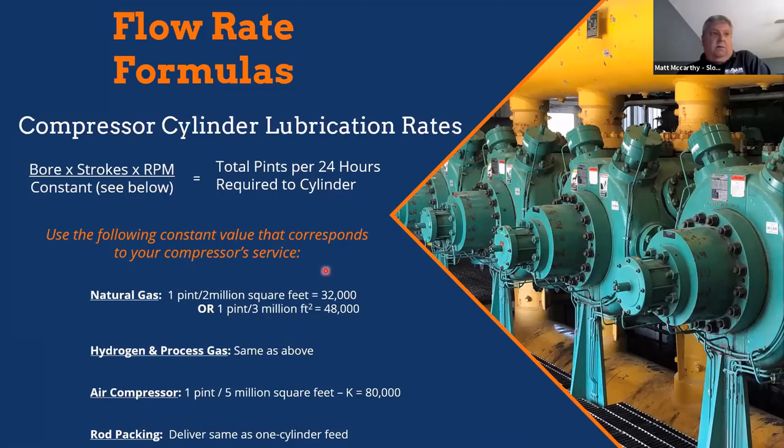If you're on that integral engine, if you're involved with those, then the power cylinder lubrication gets calculated out as well. That's part of a dual zone system where we're doing compressor lubrication and power zone lubrication.

Power zones are calculated by using the brake horsepower of the engine times 8, which is 8 pints in a gallon, times 24, which is 24 hours in a day. Then we're going to divide that by a constant, which is provided by the manufacturers. For example, in the Cooper-Bessemer GMW series, that number is going to be 7,500.

The resultant answer to that is how much oil the engine needs totally, and that will be divided evenly amongst all the power cylinders. Then on each power cylinder, it will be divided evenly amongst the number of feed points on each power cylinder.

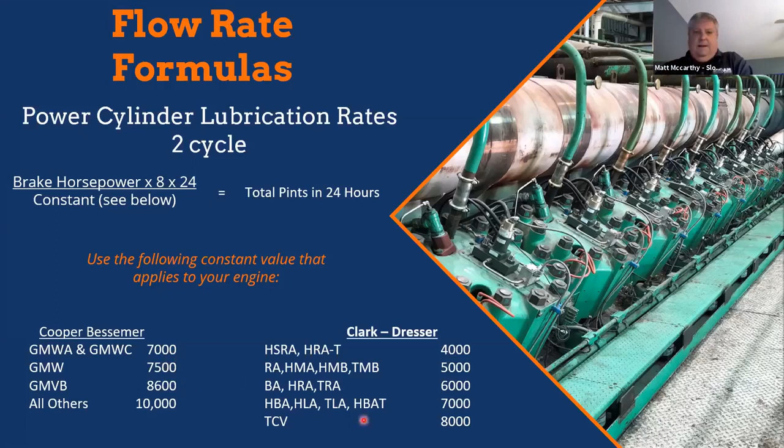Now, if you're doing a 4-cycle engine, such as an Ingersoll, KVS, KVRs, there's only valve guide lubrication, and for those we calculate 0.05 pints a day per valve guide.

So in our example here, this is a Cooper GMVC. It is an integral natural gas engine. That means, for those who are not familiar with the integral side, that this is the engine and it's integrated with the compressor cylinders, which come out on the left side here, and then they're banked down along the crankcase. So we're lubricating dual zone in this situation, power zone and compressor zone.

In this specific instance, we have all of our lubrication equipment just lined up on the end of the engine for easy access and visibility. The lubricator box, which is part of the component which drives and force feeds the oil down into the system, is driven typically by the engine. We can also drive it by an electric motor. We can control it in our tri-sip systems. We can have integrated PLC packages that completely run the whole unit off engine.

In this particular example, we've got 2 zones, as I said, one for power, one for compressor. So we have a pair of pumps for each zone that are adjusted to the proper flow rates based on our calculated requirements. These pumps individually feed divider blocks.

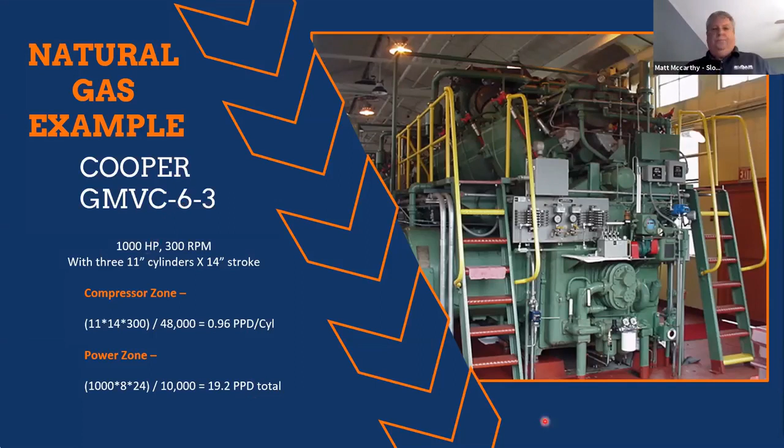Now, if you were calculating out the power zone, we're going to use the 1,000 horsepower times 8 pints in a gallon, times 24 hours in a day. We're going to divide that by the OEM spec 10,000, and we're going to provide to the power zone a total of 19.2 pints per day total. Then we're going to divide that up among the 6 power cylinders evenly. So that's where our calculations come from.

How do we get it in there? Well, we're going to force oil through from the lube pump through this divider block mechanism, which meters and delivers the oil in the proper proportions.

Now, in the old days, there was a pump for every lube point called pump to point. Today, it's divider block lubrication systems. In the old pump to point system, operators would adjust each pump to see a drop of oil in the sight glass drip at a certain fixed frequency.

10 drops every minute would deliver 1 pint a day. So if you needed half a pint a day to feed your packing case, you'd adjust that pump to 5 drops a minute.

Over time, that changes. Pumps wear, maybe it wasn't locked in and vibration starts to make the pump adjust differently. So a pump can clog up, a pump could go bad, and there was no way of knowing if a pump wasn't delivering the proper amount. So if an operator went by every day, took a look at the pumps, he had to measure every one of those feed points.

On that example on the Cooper, we're going to have 6 cylinders with 2 lube points on each one. That's 12 pumps. Compressor side, we're going to have 3 cylinders, another 6 pumps, plus the packing cases, another 3. So we've got quite a number of pumps and quite a number of drips to be looking at.

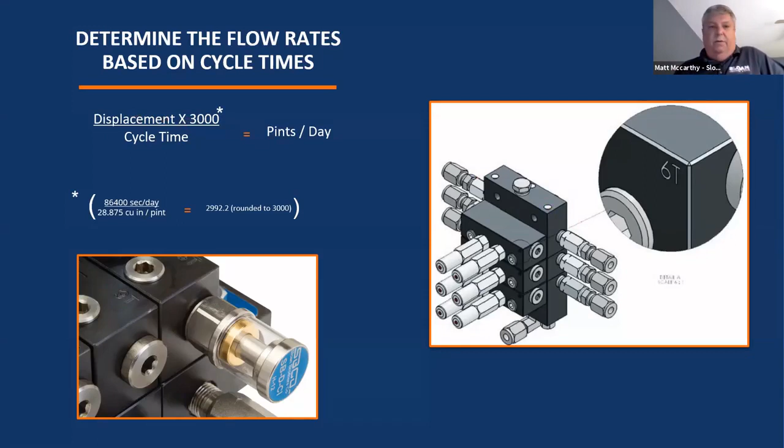Now, in order to know that this system is doing the job we expect, we need to do a lot of testing of the divider blocks on a routine, regular basis, and make sure our pumps are in reliable condition. So to know that a divider block is working right, we provide this test criteria, recommended on an annual basis.

The parameters are: we take a divider block, which is on the engine, take it off and put it on a test stand. We connect our hand pump or a purging pump and flow oil through the divider block, visually seeing that oil comes out of all the holes — a very nice, slow, gentle flow through the block, simulating the pump it's connected to when it's on the engine.

Once we verify that the block can flow free to atmosphere, it takes less than 500 pounds — in a brand new block we're seeing 200 or 300 pounds to cycle. So the delivery pressure for the hydraulic fluid going through the block cycles and moves all the pistons at less than 500 pounds.

The next step is to cap off one line at a time and force a failure by simulating a plugged line. So then we'll pump up the oil to 3,500 pounds and let it sit for 2 minutes. We want to make sure that oil does not bypass and bleed around those internal pistons or spools.

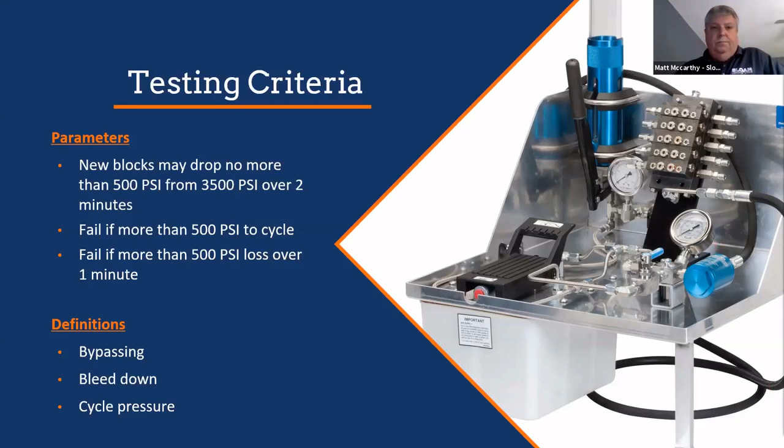So again, we verify first that the test pump is good and in working order. Remove all the lines from the block, connect the test pump, and run a purge to get the air out of the block. Pump slowly and watch for pressure less than 500 pounds. Block the outlet with a cap, pressure to 3,000 or 3,500 pounds, and time it for a minute. Test each outlet consecutively, one at a time. You can't put caps on all the outlets, pressure it up to 3,000 pounds, and wait a minute. That's not the way it's done, although that's a common misconception in the field.

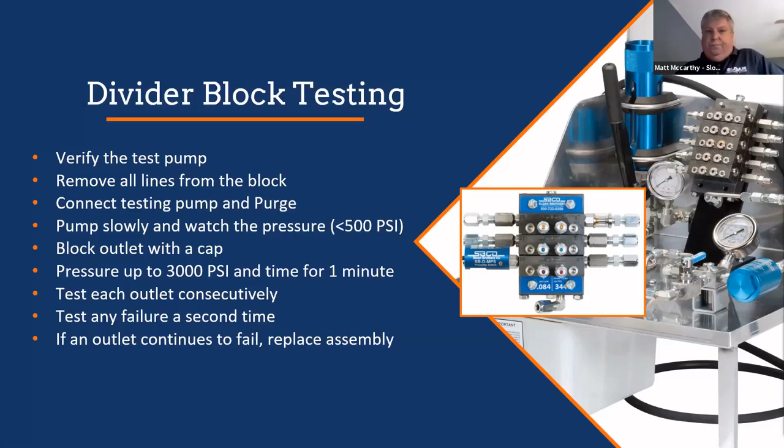So, troubleshooting lube systems. From our experience, the first steps often taken in troubleshooting only do more damage. This is due to the fact that very few mechanics have real world experience with these systems. Typically, a lube system is installed, it's in working condition, it's fed oil, and it just runs for years as is without any testing. So when something does go wrong, oftentimes the mechanics don't have any experience with the systems and need to turn somewhere. Make sure that we have a good line of communication with your people, and we can walk you through any troubleshooting.

So in that system, there's a protective rupture relief between the pump, which can generate 8,000 pounds pressure, and the divider blocks and terminal checkpoints. Between the pump and the divider block is a safety relief valve we call a rupture disc. The rupture disc is designed typically on our systems to rupture at about 3,000 pounds. So if a line downstream is plugging up, a check valve is starting to fail, as the pump continues to pump oil downstream, it's going to raise pressure if you can't deliver oil against one injection port.

So as the pistons jam up against the downstream blockage, the pressure rises in the system. And before something breaks, like a pump blowing off its mounting, we're going to rupture a relieving valve at about 3,000 pounds. That'll safely vent the excess pressure back to atmosphere pressure, and it's fed back into the system.

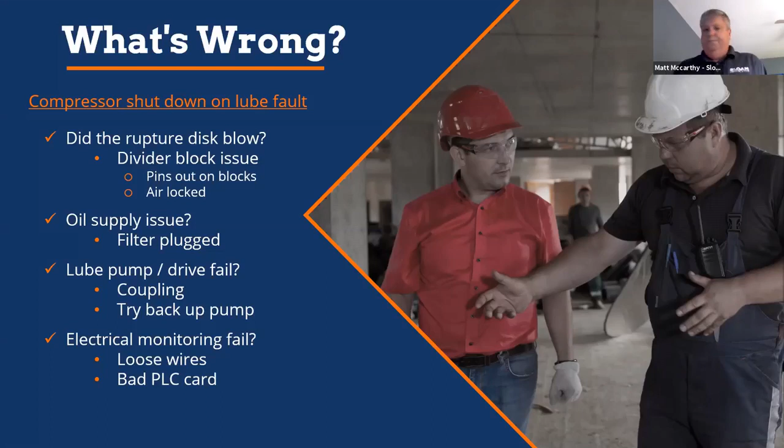So, emergency repairs — another critical factor is how prepared you are for emergencies. Spare parts are critical in an emergency. Do I have the spare parts necessary? How long can I be down? Do I have time to fix this? Do I have the skills to fix this? Do I have 5 engines in a row and can afford to take this one out of service? If I've got 2 units running and need them both running, I need the skill level to do the repairs on site, and the spare parts necessary to do the repairs immediately.

What can I substitute in a pinch? Can I take a divider section that's a 6T and put it where there's a 9T? All these issues can be discussed — just give us a call and we'll work you through those.

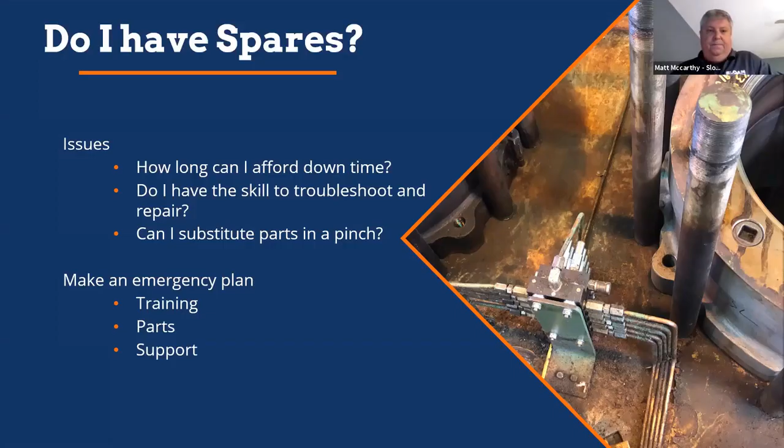But to prevent emergencies, the best thing to do is have a regular maintenance plan in place — to test divider blocks on an 8,000 or 16,000 hour basis, replace pumps, repair pumps, test pumps, change divider blocks, and change rupture discs. So what we recommend is an annual maintenance program.

Filters, we need to change filters, replace the rupture disc every year. Rupture discs see cold starts, and it's one of the least expensive components in the complete lube system, and it's a whole lot better to change that rupture disc once a year than it is to have it fail prematurely.

Test those divider blocks according to our testing procedures, and again, you need to make sure that you have good operational testing pumps so that you can provide that maintenance on site. Switch pumps, go from that built-in spare to the operating pump, switch back and forth so that the spare doesn't always sit. We want to operate those pumps on an annual basis. Turn one off, turn the spare back on.

Check lube box reservoir and change the oil. Change the gear reducer oil. If you've got an electric motor driven lubricator, we want to change the gear reducer oil there. And if you have a day tank that supplies the oil to the lube system, we want to inspect that day tank and make sure that it's not full of contamination.

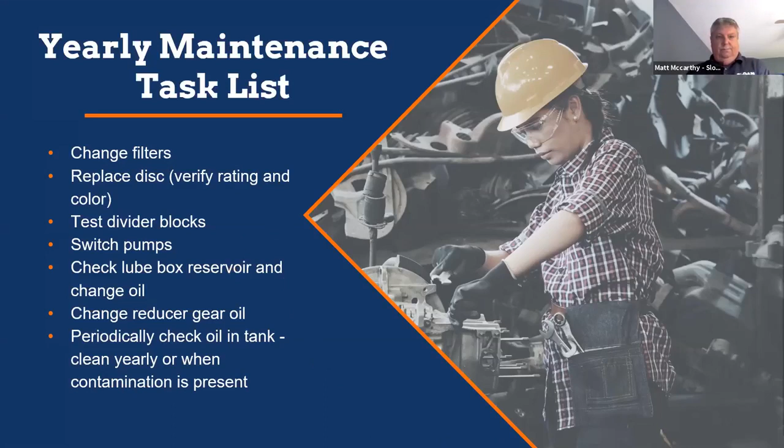So lube rate reduction, we've got all these components in place to be able to properly deliver the oil per our calculations, and we know that our systems are in good shape. You always want to make sure that that's the case before you start a lube rate reduction program.

Our flow rate constants for those compressor cylinders we talked about before was a pint in 2 million square feet or a pint in 3 million. Today, we've been able to provide the industry with our Tri-Sip lubrication system, which can actually reduce oil flow rates to a pint in 20 million or even as much as a pint in 30 million square feet. We do that through the special oils involved, the Tri-Sip fluid.

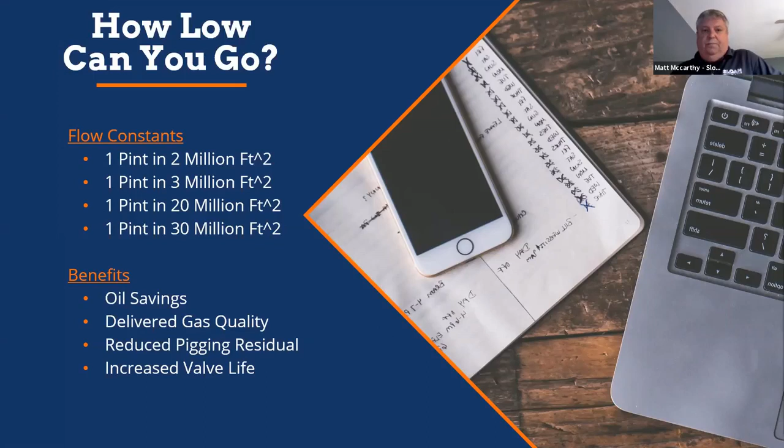So the Tri-Sip package, we're doing a case study where by the end of 2020, we're going to have 134 units installed on a gas system line. The projected savings: this will reduce the oil by about 36,000 gallons of oil usage over the system over a period of a year.

Obviously, if you're putting that much oil into the system, you're going to have to pig it. You're going to have plugging regulators with the oil in the gas stream. You're going to have filter coalescer changes more frequently, and even clogged pipelines. You're running a pipeline that's been collecting oil in the low spots through the mountains. It's just clogging up the pipe and allowing less open volume for the gas to flow past this oil. So you have to pig that out.

The Tri-Sip lube package will increase the delivered gas quality to your customer and increase the compressor valve life. So give us a call if you want to talk about how we can further reduce your oil using the Tri-Sip lubrication system.